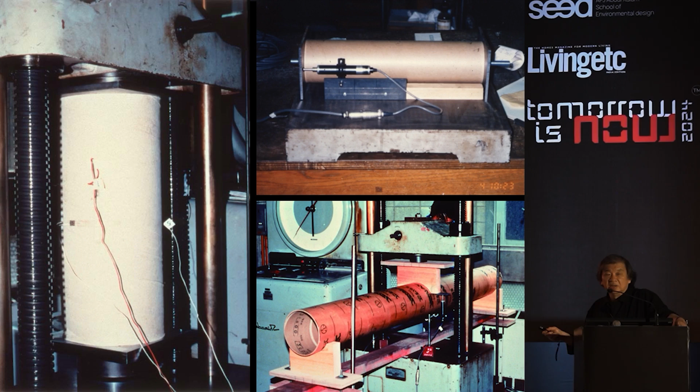Then I found out this material is so strong. So I started testing in order to use this material for building structure. Next, please.

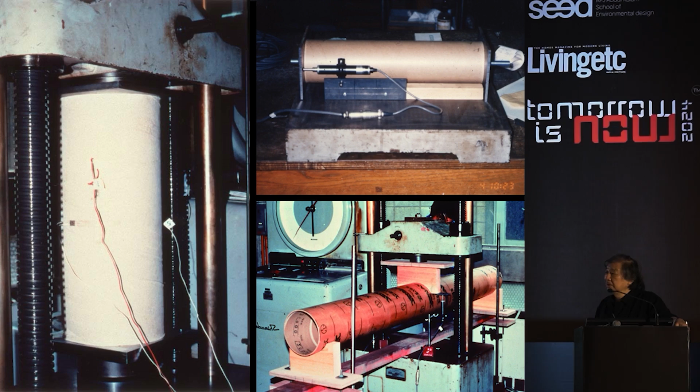This is before people started talking about environment, ecology, recycling, during the kind of economical booming period. Nobody was really interested in this kind of idea. This is the first building I built with paper tube, but it was too difficult to get special government permission to use such an unusual material for structure.

So for this building, I had to use steel posts and steel roof, and the paper tube was used as freestanding exterior and interior walls. There are 330 tubes. Diameter is 85 centimeters. Wall thickness is 15 millimeters, of course inside is empty, and the length is 8 meters. Some of the tubes are bigger, diameter 120. Inside is the toilet. Just in case you finish with your toilet paper in an emergency situation, you can tear off the inside of the wall.

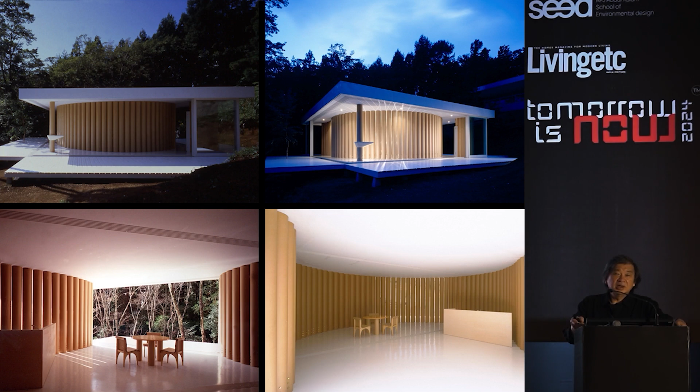Next, please. Then I designed my weekend house in order to get this complicated government permission. So I spent a year to test and to go through all the committees to convince them to get the government permission to use paper tube as a building material. So this is the first permanent building with government permission as a paper tube structure. However, I have no weekend, so still the house is empty. Next, please.

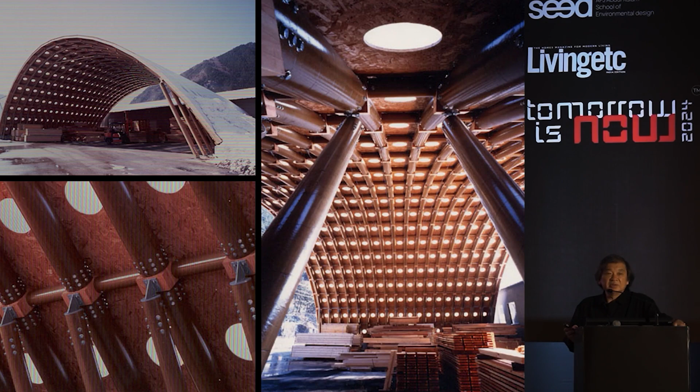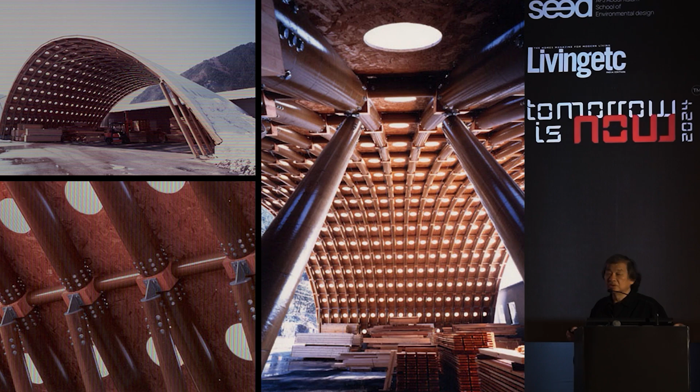A few years after, I was asked to design a roof by a local carpenter, where they have very heavy snow. They wanted to make a big roof in order to walk on during the winter season, to be built by themselves, by carpenter, not using steel. So I designed another paper tube structure with wooden joints to get another government permission as a permanent building.

This became the second permanent building out of paper tube structure. Year 2000, the world started talking about environmental issues. This is the World Expo held in the city of Hanover, Germany. The main theme of the expo was environmental issue, and I was the only architect using recyclable material for building structure. So I was chosen by the government to make the Japanese pavilion.

This was really an incredible chance to collaborate with genius German architect Frei Otto to realize the first grid shell structure in paper tube.

This is a paper tube produced in Germany.

As part of the contract, this company had to promise to recycle. After building demolition, half a year later, they had to collect them to recycle. That's part of the contract. Also, I didn't want to use concrete because concrete is a difficult material — it's actually not possible to recycle. So for the foundation, I made a wooden box filled with sand instead of using concrete.

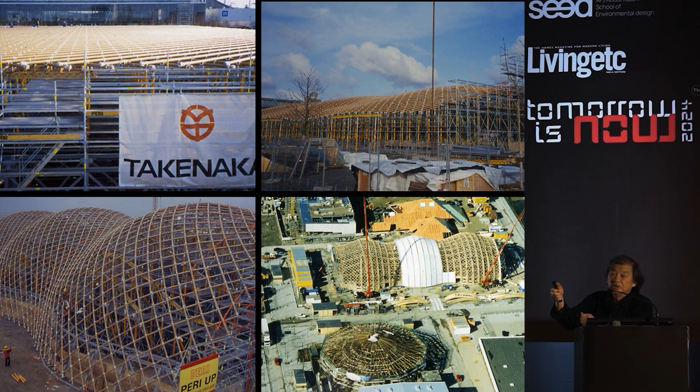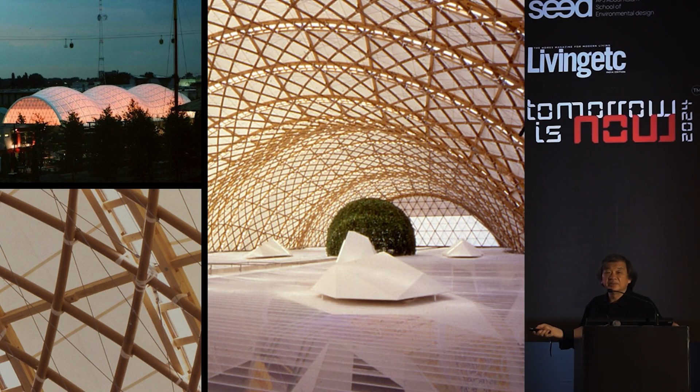And this yellow scaffolding can be rotated by hand little by little, to push up and create this three-dimensional shape to stabilize the structure. Even the connections are just fabric tapes — easy, inexpensive, and also easy to dismantle. So we covered over 2,500 square meters with paper tube structure.

This is a project called Nomadic Museum. Canadian artist Gregory Colbert asked me to design his own museum, which travels from city to city, country to country. I decided to use used shipping containers of 20 feet, 6 meters. It's not because shipping containers can travel — I chose shipping containers because this is an international standard, and we can find the same kind of container anywhere in the world. So here in New York, we built a structure over 200 meters on the wooden pier.

We rented containers from a nearby shipyard for only 3 months during the exhibition. After the exhibition was over, we just returned the containers to the original shipyard and traveled to Santa Monica Beach, Los Angeles, without bringing the containers, because we could rent the same kind of containers in Los Angeles. I made a checkerboard pattern in order to minimize the number of containers, connecting containers with the existing connection in the corner.

Inside, there is a paper tube of 10 meters supporting the roof. This is when we went to Santa Monica. We got this parking lot by the beach, but it was not big enough to bring the 200-meter museum, so we had to divide it into 2 parallel 100-meter galleries. Also, artist Gregory asked me to design additional theater space.

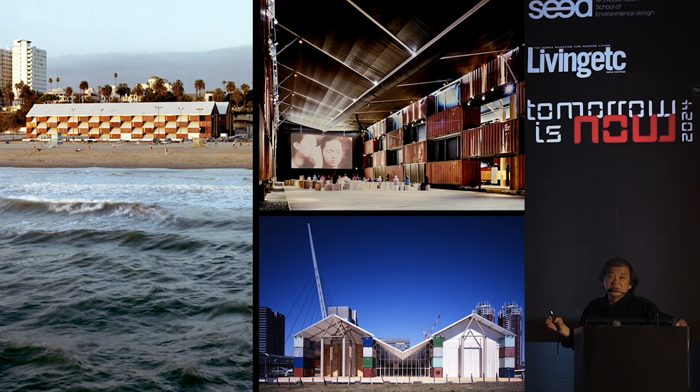So we kept the space in between the 2 galleries and made a new roof to create a theater space. The museum became 50% bigger than the one in New York without adding the number of containers — the number of containers was the same as in New York.

This is when we went to Tokyo. As you can see, the color of the container is different — this is one we happened to borrow in Tokyo.

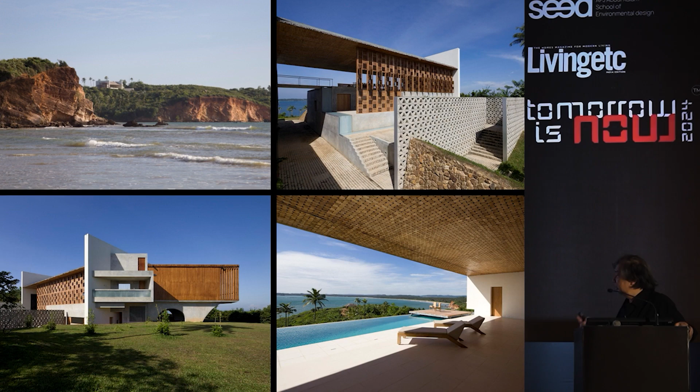In 2004, there was a big earthquake that created a tsunami in the surrounding countries in the Sumatra area — the Sumatra earthquake and tsunami. Here in south beach of Sri Lanka, the entire fisherman's village was totally destroyed by the tsunami. I went there to build housing, and one of the sponsors supporting our project asked me to design his own house after the project was over. So this is the one we built.

This client has parents who have a house. Actually, the site is so big, somewhere over there, that in the morning they use a telescope just to say good morning. This house was designed by Japanese architect Tadao Ando.

He's a genius — he didn't visit the site at all, but he built a wonderful concrete house. Further right over here, there is another wonderful house designed by Geoffrey Bawa. I didn't know Geoffrey Bawa until I went to Sri Lanka, but I was really shocked to see his architecture.

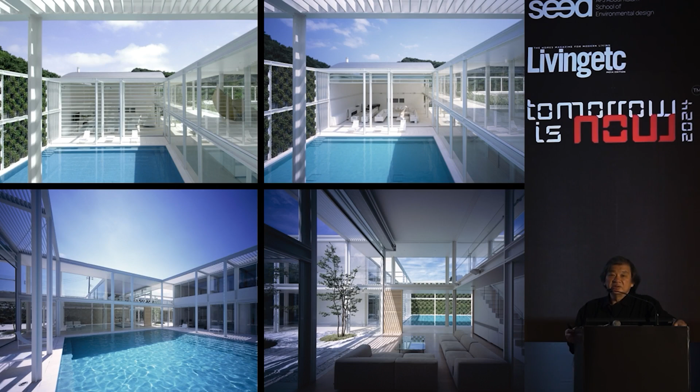This is a rather big house in Japan, in Fukushima. Although this is a big site, unfortunately there were not beautiful sceneries outside. So I made a courtyard and swimming pool inside the site, so that instead of looking out, all the rooms have a window to look into the courtyard and swimming pool.

And they wanted to go to the swimming pool very often. So this is a glass shutter, normally used for fire stations, which I improved for residential purposes. We just push a button and the shutter goes up immediately, connecting inside and outside. Even when the shutter is open, the family room is connected with the courtyard. So this is the way I connected inside and outside.

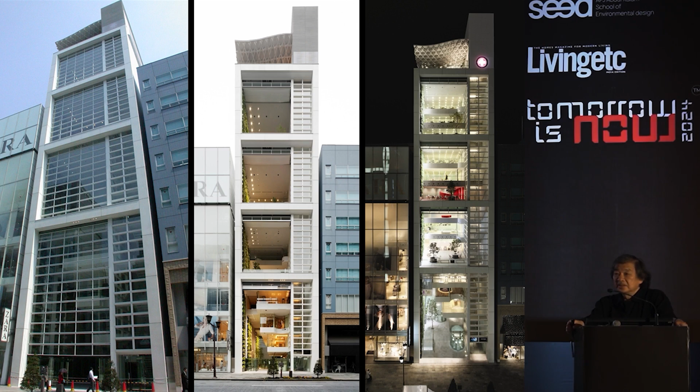This is the headquarters of the Swiss watch company, Swatch Group, which owns many famous brand names like Omega, Tissot, Jaquet Droz, Blancpain, and so on. This is the headquarters in Tokyo. This was a competition, and it was built in Ginza, the most expensive commercial land in the world. That's why the land is very narrow and very deep.

The upper part is offices. Every 3 floors there are 3-floor atriums. Even during a good season, we have to have air conditioning if it's closed. But I didn't want to depend on air conditioning, so I put glass shutters to open and take advantage of natural ventilation in the good season.

They also requested 7 boutiques of 7 different brand names. Because the site is very narrow, if we made 1 boutique facing the commercial street, the rest of the 6 boutiques would have to be in back, downstairs or upstairs. I thought that was very unfair, not facing the commercial street directly. Although it wasn't requested by the client, I wanted all 7 boutiques connecting to the commercial street directly. So I made a 4-floor opening with a glass shutter in front and back, with a green wall.

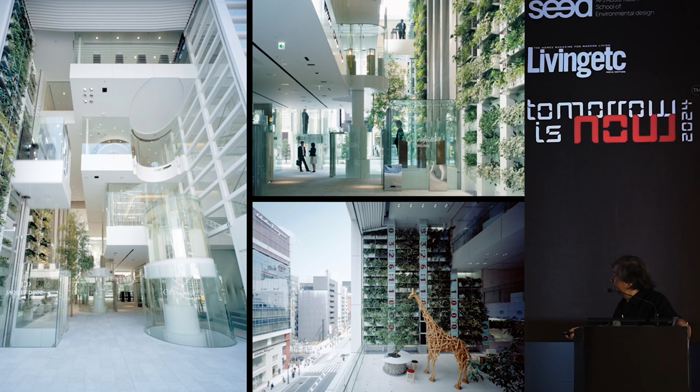And some water features to make a passage so anyone can come in and go through. Along this passage there are 7 glass showrooms of 7 brand names. Next, please. So, for example, this showroom is one of them.

Each showroom is built with a hydraulic elevator. So you can see a few items, and if you want to see more, just push the button and they go up to bring your own customer. For example, this showroom goes up to here, this one goes there. So because of this unusual solution, each boutique has direct access from the street to their own boutique.

And that is why I was lucky to win this competition. This is the 5th floor atrium. This customer service area, when the glass shutter is open, becomes a semi-outdoor space.

And here is the giraffe. Here's the true story behind this giraffe. Just before the building was completed, the president of the Swatch company came to see the construction, and I showed her around. She was very surprised when she came into this space and asked me, 'Where's the giraffe?' She misunderstood, because during the competition stage I submitted a section drawing, and in order to show the height of this 3-floor space, I drew a giraffe. She thought the giraffe was part of the design, and she was so insistent that she didn't want to accept the building as complete unless she saw a giraffe. So I had to spend my own money to make a giraffe out of wood. This is a real true story.

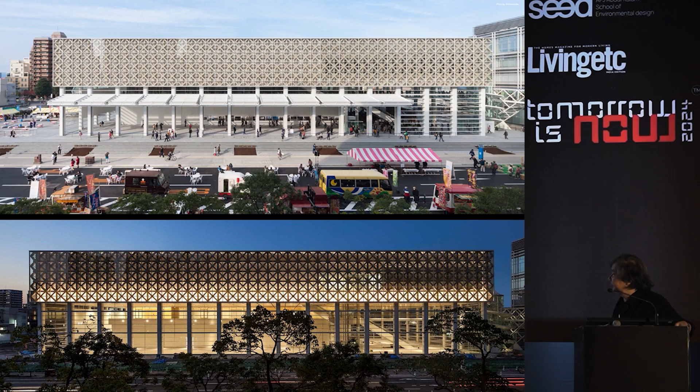This is a museum in Oita Prefecture, south of Japan. This was a competition. Normally a museum is what we call a black box or white cube, a rather closed box, but I wanted to open the museum to the public and the street.

So I made a special door called a bifolding door to be opened to the street. In good season, they sometimes close the street to have many different events, so the inside of the museum can be connected to the street easily.

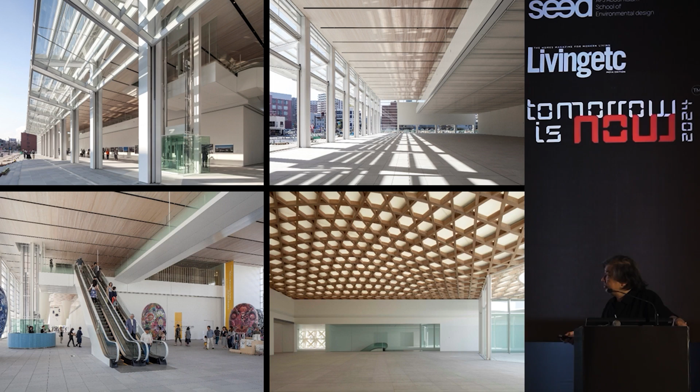The Oita area is very famous for bamboo craft. So I made a 3-floor gallery with a timber structure, woven using locally available cedar trees, like woven bamboo patterns. Next, please. This is the bifolding door when it's open.

The ground floor lobby and gallery ceiling is hung from upper floors, so there are no pillars. We can have movable partitions to close off or create different layouts depending on the type of exhibition, freely, without any pillars.

This is the 3rd floor lobby with the skylight. It's like a woven bamboo pattern in timber, bringing natural light into the main lobby. Next, please.

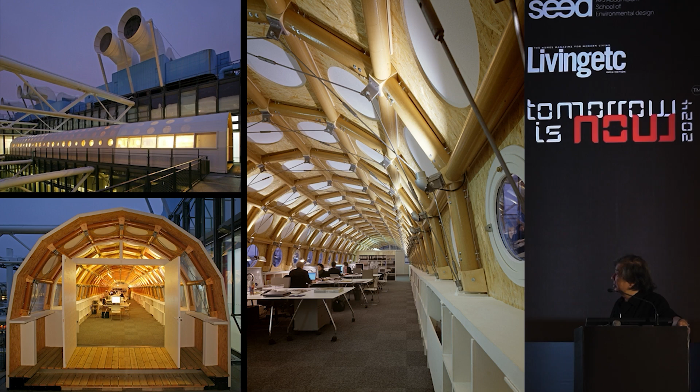This is the famous Pompidou Center in Paris, designed by Renzo Piano and Richard Rogers, completed in 1977. In 2003, the Pompidou Center organized an international competition to design a satellite museum in the city of Metz, on the east side of France.

I was very lucky to win this competition. When I visited museums designed by, for example, Tadao Ando or Arata Isozaki after they won competitions outside their home country, I was always surprised because the final completed design is different from what they submitted. And I found out the reason.

Normally, when we work outside our country, we have to collaborate with locally licensed architects. We also chose good architects, but in the end, they become our enemy. Instead of listening to us to make a complicated design that would go over budget or extend the construction period, they sided with the client to save money and build on time, because they have to spend the next many decades with the local client. That's one reason why when we get a project outside, it's very difficult to realize what we design.

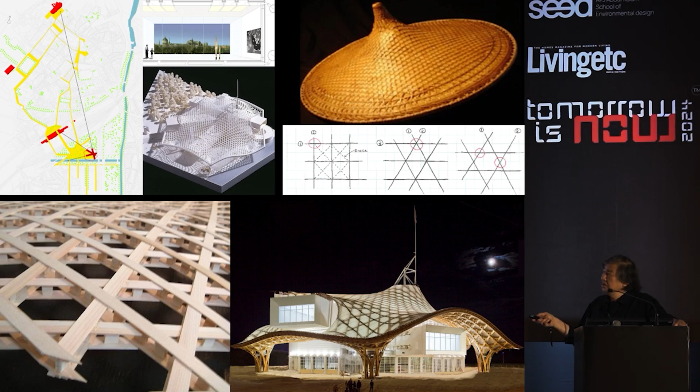Next, please. This is what I submitted for the competition. This is the map of the city of Metz. This is the central train station, 90 minutes from Paris by TGV. The main part of the city is on the north side of the train station. Our site was on the south side, which was totally empty.

Although we were away from the center of the city, I wanted to connect my museum with the center of the city. This is the model I submitted.

There are 3 so-called gallery tubes, 15 meters in width, 90 meters in length. 3 of them are stacked on top of each other and shifted 45 degrees. At the end of each gallery, there is a picture window. The top tube faces the very famous cathedral, framing it with the picture window.

The second tube faces the train station. Because Metz is on the east side of France, after every war it was occupied by the Germans, so this city has lots of classical German, wonderful architecture all over, including this train station, which is already an important part of the history of the city. So the second tube frames the central train station.

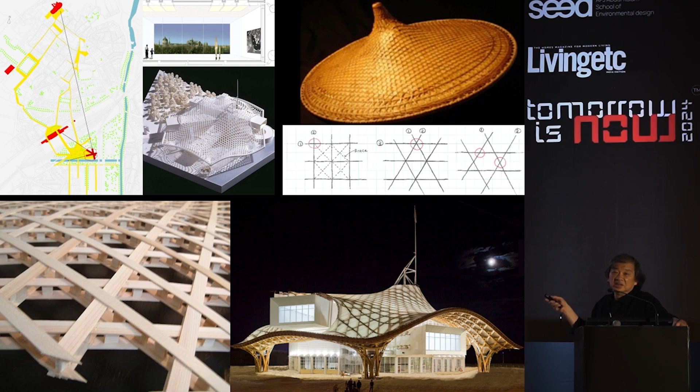The roof I wanted to design in timber. The idea comes from a traditional bamboo hut. I studied different patterns. For example, if we divide a square, it's easy, but because a square doesn't have in-plane stiffness, we need bracing, and the connection becomes very complicated.

If we divide with triangles, it's a very stable shape. We don't need any bracing, but there is always a connection where 3 elements meet.

The pattern commonly used for bamboo craft has a hexagon and triangle combination. A hexagon alone doesn't have in-plane stiffness, but because of the triangle, we don't need any bracing, and at every connection, only 2 elements meet. That is why many bamboo crafts use this pattern, because the joint is very simple. So I made this pattern, with an upper chord and lower chord connected with wooden pieces.

I wanted to avoid using complicated steel connections in order to take advantage of the characteristics of timber. Once we use steel connections, this is no longer a timber structure, just a steel structure. So I want to avoid metal connections. Here we just need a long board to connect all the pieces together, so it's very simple and easy.

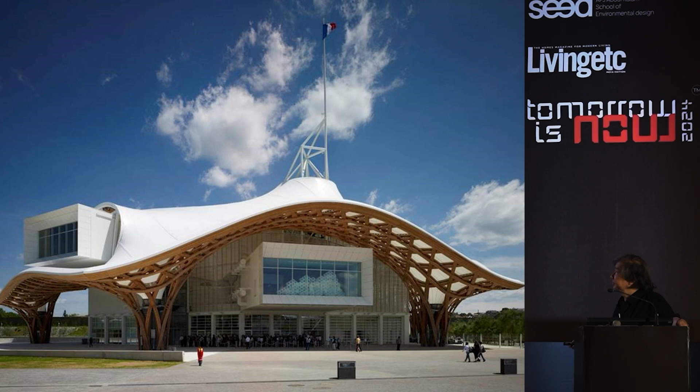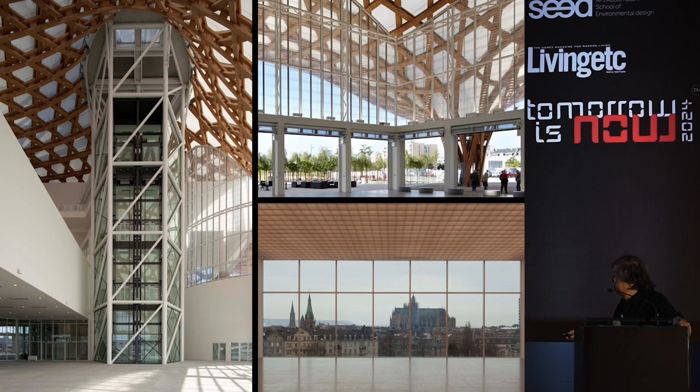This is the completion. This is a picture window. The ground floor is covered by the glass shutter. Before opening hour, people wait under the big roof in front of the glass shutter. When opening hour comes, the glass shutter opens to connect inside and outside. This picture window frames the cathedral.

The central tower, with the elevator and emergency stair, is made as a steel tower, hanging all the timber structure. So this is a tensile structure, a tension structure.

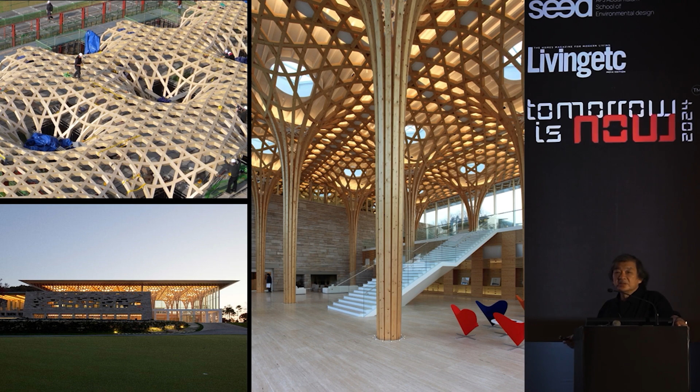While I was designing Pompidou Center in Metz, I was asked to design a golf clubhouse in South Korea. The chairman of this company really loved my design for the Pompidou Center roof, so he asked me to design the roof in timber. This is a construction photo. I used the same pattern, hexagon and triangle, but this is a simple compression arch, not a tension structure, so we don't need any metal connection. We just cut and connect with traditional joineries.

This technology of making three-dimensional timber cutting only exists in Switzerland and Germany. It doesn't exist in Japan or South Korea. But this was a request of the client, so we had all the elements cut in Switzerland and brought over to South Korea to assemble locally.

Because I don't play golf, I didn't know what was inside. My only memory of golf is from when I was very small, when my father used to take me to the golf practicing range. At that time we put the ball on a tee made of wood. That was my memory. Now the tee is made of plastic, so I made the structure like a wooden tee.

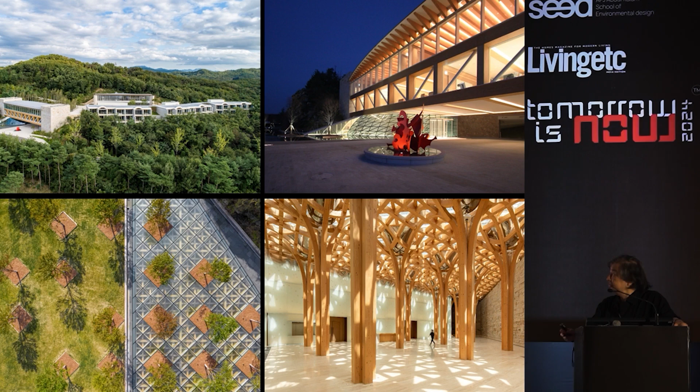The same client asked me to design the employee training center on the same campus. The main element of this program was a big hall like this. But I didn't want to put a black box like an auditorium on such a beautiful landscape, so I put it underground. But I didn't want people to feel like they were underground, so this is a foyer made with a timber structure, supporting a glass roof with a pond of water.

On top of each tree column, there is a stainless steel pot with mud, growing trees, so that this pattern of timber extends up on top of the water, bringing natural light through the water, and light and shadow.

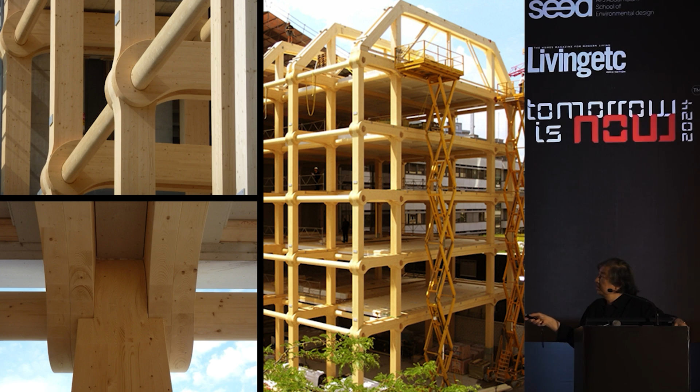This is a 7-story office building in Zurich, Switzerland. Again, I didn't want to use steel connections. I designed the rigid connection without steel. The post, one column and two beams, and the perpendicular beams, have an oval profile. The oval profile beam is inserted so that it doesn't rotate. This became a very good rigid connection without metal connections.

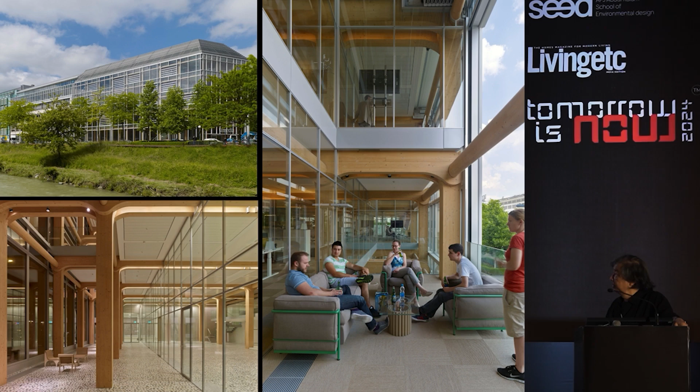The exterior is just a simple aluminum curtain wall with a glass shutter. On good days, the glass shutter can be totally opened to connect inside and outside, creating an in-between space.

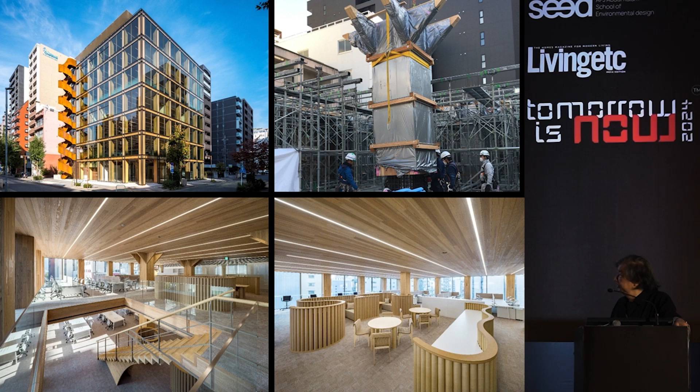This is a 7-story office building in Nagoya, Japan. In Japan, we have terrible fire regulations, very, very strict, so we cannot build a 7-story timber building like in Switzerland. We have to cover the timber with cement or plasterboard, and there are many timber-looking buildings just covered with thin wood over cement or plasterboard. I didn't want to make such a fake timber structure.

Even with this very strict fire regulation... when the concrete is dry, we remove the plywood formwork and finish with different materials, so there are many layers. I made a concrete formwork out of CLT, serving as the concrete formwork but also as the final finish. So this prefabricated CLT formwork just covers the steel and holds the concrete, remaining as the final finish.

We also tested it. The concrete takes the compression and the surrounding CLT works for the bending. So this is a hybrid structure between CLT and concrete, exposing CLT as the final finish, and we can save a lot of time in construction.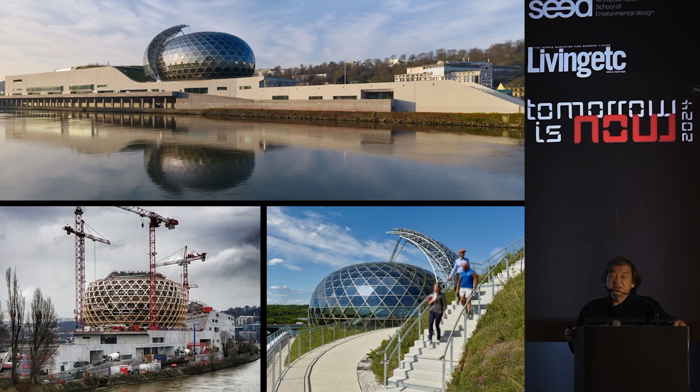This is a project called La Seine Musicale in Paris. This is a theater complex. This was also a competition.

This is an island in the Seine River. This used to be a Renault automobile factory in the 90s, but they moved out and it became empty. The local government decided to organize a competition to make a theater complex, and I was very lucky to win.

This location is kind of an intersection of the highways, and after they intersect, they drive east to the center of Paris. So the local government wanted to have some kind of symbolic monument at this intersection of highways. I made this concert hall for 1,200 seats.

In timber, covered by glass. This is a sail. Normally a sail receives wind pressure, but this one receives sunlight to create energy. It's a solar panel which follows the sun, moving little by little, always facing the sun so it becomes more efficient at creating energy. But this also creates shading behind the sail to save on the air conditioning effect.

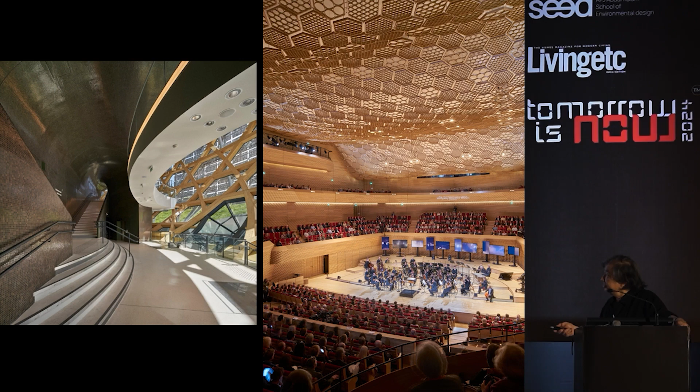I made a totally new mosaic tile working with an old mosaic factory in Vicenza, near Venice in Italy. This changes color depending on the angle of the sun, from red to green. This is the timber structure, as you can see, and the back of the solar panels.

This is inside the concert hall. The roof is made with paper tube, using different diameters of tube. I worked with a very good acoustical engineer to make this paper ceiling achieve good acoustical conditions.

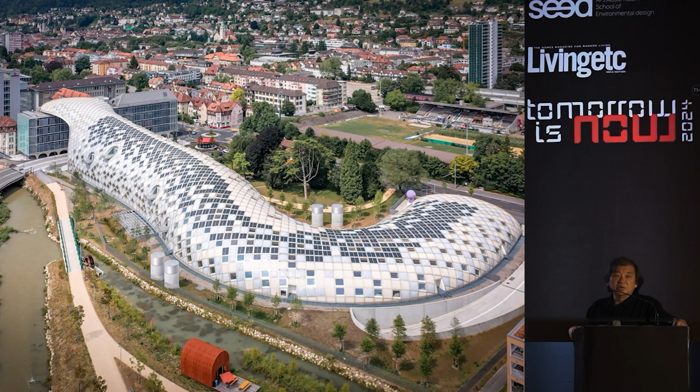This is the headquarters for Swatch and Omega in Switzerland, in Biel/Bienne. Because the shape of the site was rail-shaped, I made the headquarters of Swatch an organic shape, since the design characteristic of Swatch is rather playful and colorful, instead of the Omega design which is quite rigid. So the other building I designed for Omega was quite straightforward.

This became one of the biggest timber structures, covered by solar panels and ETFE membrane. This structure also covers a public street leading to the next building. This is the museum and conference center for Omega and Swatch.

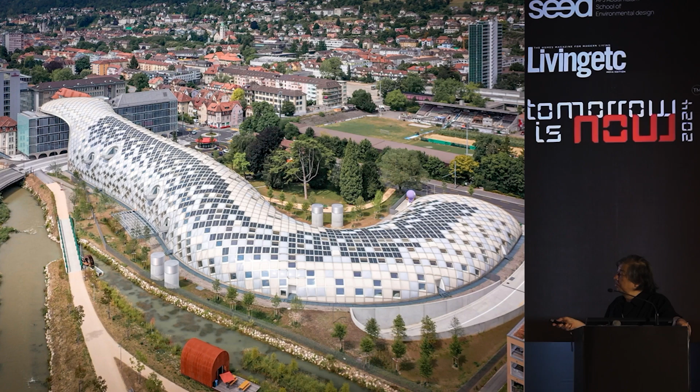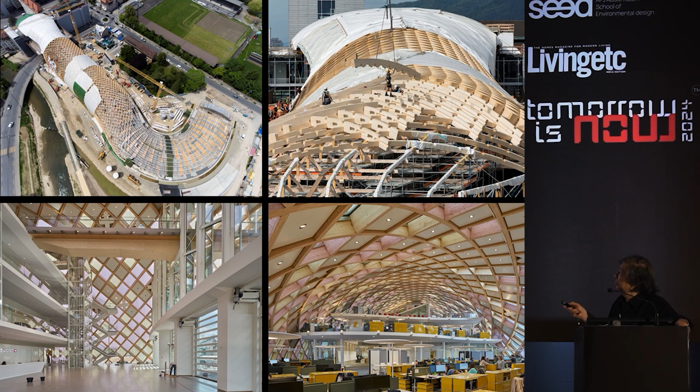As you can see, the timber structure covers a public street, and on some Sundays they can close the street to have a public event under this big roof. This is a construction photo. As I explained, Switzerland has a wonderful three-dimensional cutting machine. Each element is cut totally precise, so we just need a big rubber hammer to fit them easily and quietly. Construction is very quick and easy.

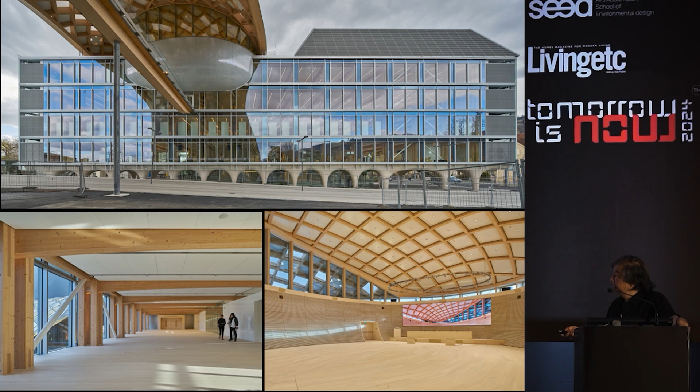Inside of the office space, inside the foyer space. This is the building in front, the museum of Omega and Swatch and the conference hall. Only the ground floor is made in concrete. The rest, four floors, is timber - beams, columns, floors - and this roof coming from the Swatch building is a conference hall.

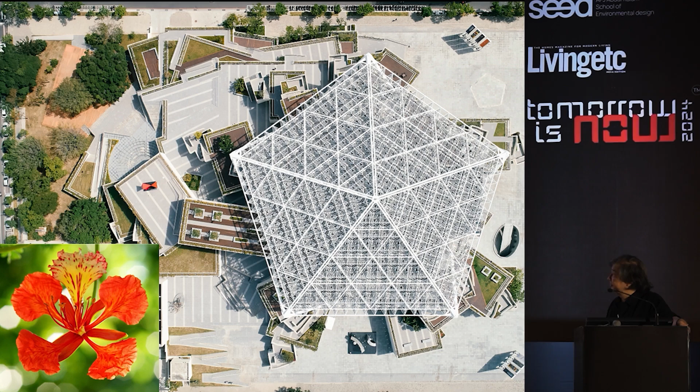This is a museum in Taiwan, in the city of Tainan, south of Taiwan. This is a flower, the symbol flower of the city of Tainan. It's a pentagon, so I made a pentagon roof. It's called a fractal roof.

I wanted to create a park in the middle of the city, so each gallery is stacked on top of each other and shifted to create a sculpture garden, and also a garden for the people. The public can come up freely and enter the museum from any level.

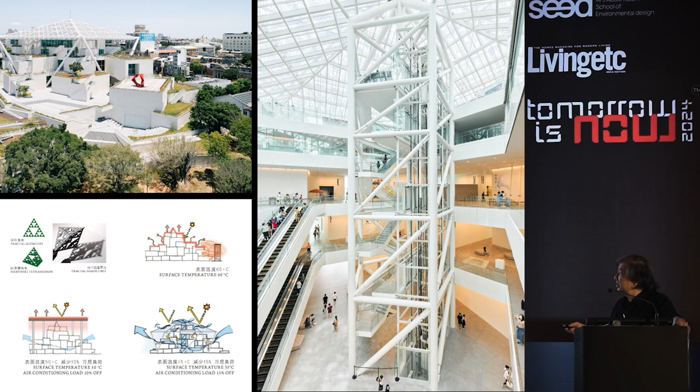This is a diagram showing what fractal geometry is. Fractal geometry is one where you can divide, and the same proportion of geometry repeats forever. For example, this is a triangle - you can divide it smaller and smaller, and always the same triangle is there. So this is fractal geometry.

Professor Sakai of Kyoto University found that if we put wind through a three-dimensional fractal shape, it creates movement of the wind. So he made some parasol shapes as a resting area in the park. I collaborated with him to make a big fractal roof to cover this museum.

This is a simulation by computer. If the building is exposed totally without any roof, the surface temperature becomes 60 degrees. If we have a roof, we can reduce 10% of air conditioning, but there's still radiation. If we cover it with a fractal roof, it's like being underneath big trees - very cool because it creates movement of the air. We found we can reduce 15% of air conditioning under the fractal roof.

So this is why we made the fractal roof to cover the building, to bring natural light and shadow to the main atriums. This is the most recent small museum in Hiroshima.

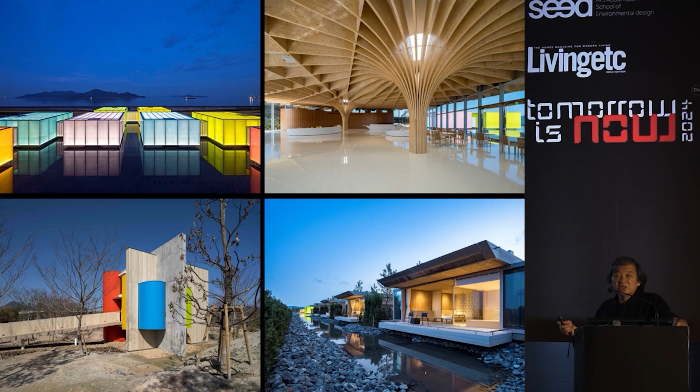This is a floating gallery. Hiroshima is very famous for shipyards, there are many ship companies building ships, so I collaborated with a shipbuilding company to make this gallery on top of the floating platform. This is standard technology to carry things behind the boat. I made a small gallery on top of them, 8 of them.

This is the water. When we have different exhibitions, we can change the layout of the gallery by making the gallery floated. By adding more water, this gallery can be floated, then only 2 men pushing by hand can move the location of the gallery. After we change the location, we just put bridges to make a different layout, and we remove the water, then the gallery sits on the bottom to stabilize. So every time you go to the museum for different exhibitions, we can see the shape of the museum is different.

This is the main foyer space with timber structure. It's oval shaped, with two center points with the timber structure. There are 10 different villas.

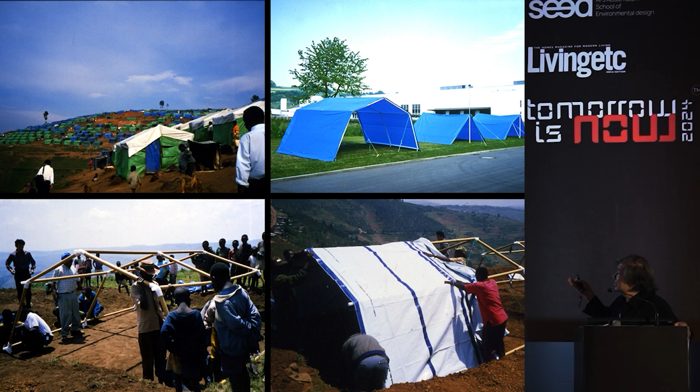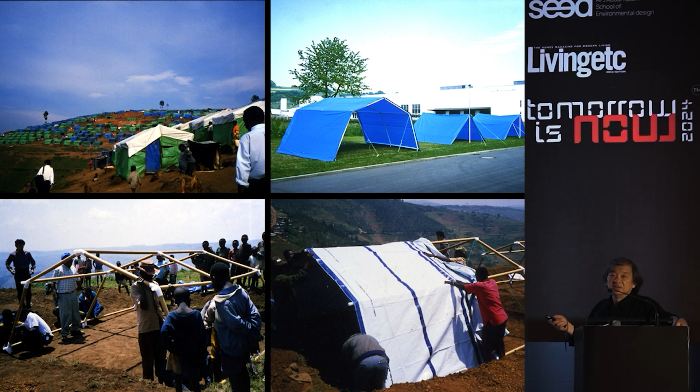Behind this, there is a seminar house designed by Tadao Ando. Further right, they have another factory designed by Nicholas Grimshaw and Alvaro Siza. Further right, they have their own fire station designed by Zaha Hadid. So this company has the most expensive collection of architecture, and my prototype became their cheapest collection.

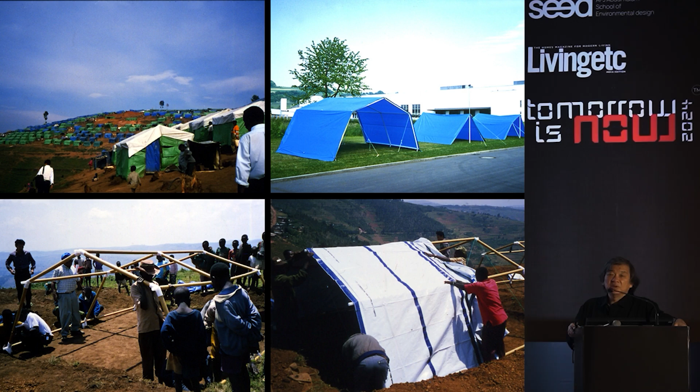This is the Byumba camp. Although I wanted to design something more comfortable, because of the policy of the United Nations, we are not supposed to give them something comfortable, because if the shelter is too comfortable, they're going to stay there longer. They want them to go back home as soon as possible, so I had only 50 US dollars per unit. This is a very simple shelter made of recycled paper tube in order to stop deforestation.

Year after, in 1995, the city of Kobe, Japan had a big earthquake. Over 6,000 people were killed, and the city was also set on fire after the earthquake. I read in the newspaper that there were Vietnamese refugees gathering at a Catholic church.

I thought the refugees must have had a more difficult time than the Japanese evacuees, so I went to see them at this Catholic church. The city was totally destroyed by fire, so it was very difficult, but I finally found this church. All the buildings were destroyed by the earthquake and the burning fire that followed. They were having morning service outside, around the fire.

After the morning service, I proposed to the priest: why don't we rebuild a temporary church out of paper tube structure? He thought I was crazy proposing building after the fire, and he didn't trust me. However, I didn't give up. Every Sunday, I commuted to Kobe.

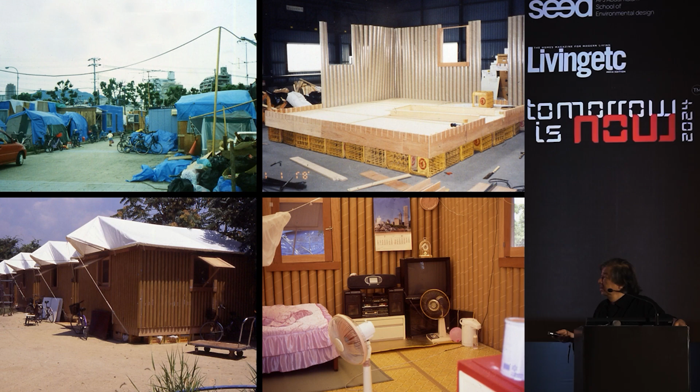And I met the Vietnamese people. They are living like this in a park with a plastic sheet. In fine days, inside the temperature becomes over 40, and on rainy days, all the floor gets wet.

Also, the government started making temporary housing, but Kobe is a very congested area. They built temporary houses outside of the city, but these people have jobs only in particular factories in particular areas. If they move out from the city, they can't do their job, so they want to keep living here even in such a poor condition.

However, Japanese neighbors try to kick them out because they are afraid the park is becoming like a slum. However, they have no place to go. So we decided to make temporary housing for them.

So I gathered my students, and this has to look temporary, but it has to be more comfortable. So this is a 10 centimeter diameter paper tube, only 4 millimeter thick, sitting on top of a foundation made of plastic beer crates. In Japan, there are two major beer companies, Kirin and Asahi, but Asahi makes their beer crate red, which doesn't go with the color of the paper tube.

So I asked Kirin to donate the beer crates, but we were very disappointed because we expected they would donate beer crates with beer inside, but they were totally empty.

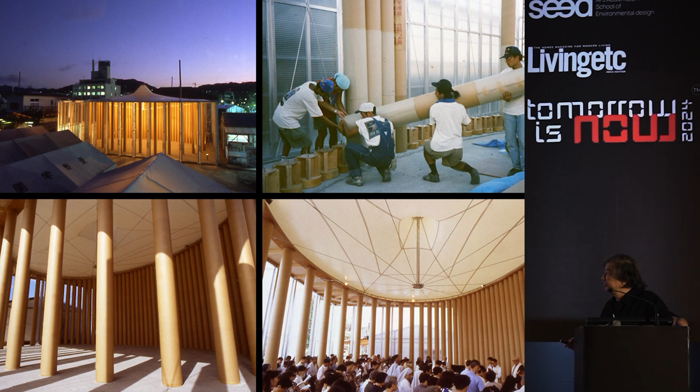People lived there for 4 years. Then the priest trusted me to make a temporary church. We only got a 10 meter by 15 meter rectangular site.

Students came from all over Japan to make it out of paper tube. It's a rectangular shape, but the paper tubes were laid out in an oval shape, which comes from one of my favorite churches, designed by Bernini in Rome.

This is the first time they had a morning service under the roof. The priest thought they could use it for a few years, but it was there for 10 years, because it became a symbol of the reconstruction of the city. It was used not only for religious services but also for many community services: concerts, movies, weddings. So this became a symbol of the city.

So they kept it for 10 years. But after 10 years, they decided to rebuild something bigger. I was very lucky to be the designer. But also there was a big...

earthquake in Taiwan. We disassembled them to send over to Taiwan, and reassembled it in the village of Puli as a permanent church and community center.

It's still there. There I wonder, what is the definition of a temporary structure? What is the definition of a permanent structure? Even a building made of paper by a student can be permanent, as long as people love it.

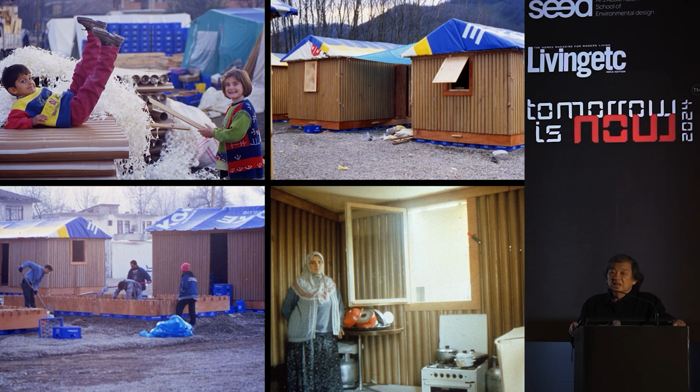In 1999 in Turkey, they had a big earthquake. I was asked to make temporary housing. All materials were locally available. Paper tubes and plastic beer crates were donated totally free of charge by local manufacturers.

And this is my favorite photo. Children helped us because it was very cold. We put waste paper inside the paper tube to make the wall more insulated.

In 2001 in Gujarat, there was a big earthquake in India, and I was asked to make temporary housing. All materials were locally available.

Even this paper tube was made by a fabric company - they make their own paper tubes to wrap fabric around for shipping. The only thing I couldn't get was a beer crate, because, as you know, nobody drinks beer there.

So my local Indian architect proposed using a red Coca-Cola crate, but I thought a red Coca-Cola crate didn't fit into the context of this location. So we made a traditional mud floor and foundation.

Some of them are used as a house, some as a school. This is a photo I received last year from local architects - it's still there, used as a local clinic.

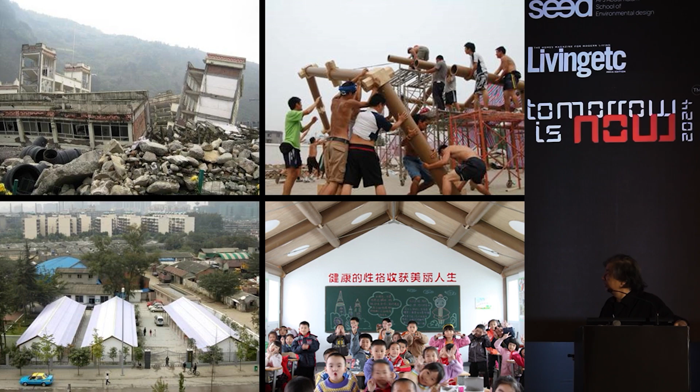2008, two months before the Beijing Olympics, the city of Chengdu had a big earthquake, over 80,000 people killed. Also, many of the schools collapsed, killing children.

I started preparing temporary houses, but the local government didn't want any foreigner making temporary houses. Instead, I met the schoolmaster, and she asked me to make temporary classrooms. So I brought my Japanese students to work with the local Chinese students for 5 weeks.

Using locally available paper tube with wooden joints, we made 9 classrooms with a timber and paper tube structure together with the students. As you can see, the children are so happy because they could come back to their original school. It's still there.

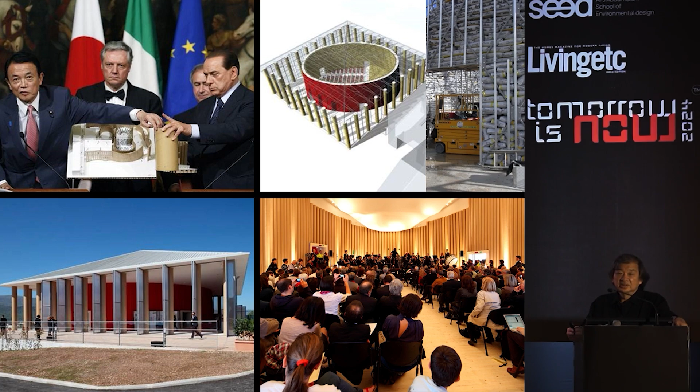2009, Italy, the city of L'Aquila, near Rome, had a big earthquake. This is the former Italian Prime Minister, Mr. Berlusconi, and he decided to bring the G8 summit to L'Aquila. This time Russia was part of the summit, so this was not G7, this was G8.

Because of this big earthquake, he decided to bring the G8 summit to L'Aquila to ask the international community for some support. Immediately after the earthquake, I went there to meet the mayor. The mayor asked me to design a temporary music hall, an auditorium, because this city is very famous for music. They have their own philharmonic orchestra and school of music, but they had no place to play.

That's why I started designing a temporary concert hall. I got a phone call from the Japanese ambassador in Rome, and he decided to support my fundraising. So this was a wonderful press conference with the Italian Prime Minister and also the Japanese Prime Minister, showing my model. Mr. Berlusconi didn't know what he was holding - he was holding a paper tube. Because of this successful press conference, I got €500,000 to build the temporary concert hall.

I didn't want to use concrete for the wall, although it had to be very well acoustically insulated. I just made a frame out of scaffolding pipes and put sandbags in to get very good sound insulation. Inside, it's covered by different diameters of paper tube as an acoustical element. The exterior tubes are structural, just covered by a red curtain.

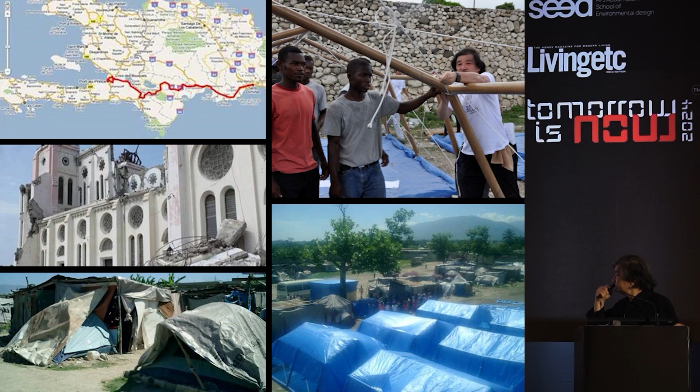2010, Haiti, a small island in the Caribbean Ocean. The south left half is Haiti, the right half is Dominican Republic. Because the airport and Port-au-Prince, the capital of Haiti, were totally destroyed.

I had to fly over to Santo Domingo, drove over 7 hours, and found a situation like this. I couldn't get any material locally, so I made a team with students in Santo Domingo, preparing paper shelters to bring over and train local people to build them themselves.

2011, north of Japan, we had a big earthquake, tsunami, and nuclear problem. This is a typical emergency evacuation facility, a gymnasium. There's no privacy - the government doesn't care about privacy. But I thought privacy is the most basic human right between families.

So I made a partition system with paper tube - small diameter tubes just inserted, hanging fabric with a safety pin - and we can open and close it to adjust the size depending on the size of the families.

In the beginning, all the government authorities who organized the evacuation facilities rejected them. They said it's easier to control people without partitions. They didn't care. But in this particular city, the tsunami killed the mayor and most of the city officials, so this facility was organized by a physics teacher from the high school. He doesn't say what the government says - he said this is a very good idea.

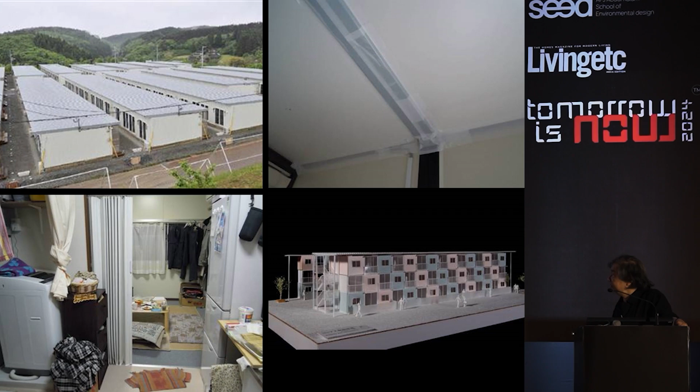After people have spent 4 months in evacuation facilities, they can move to temporary houses made by the government like this. It's very poor - they're so close to each other, it's difficult to open the window. Inside is so messy like this.

Also, many areas had the ground fluidized, which means the ground became like this. So I knew that there are many areas that don't have enough flat area to make a single-story temporary housing.

So I prepared 3-story temporary houses with 20-feet shipping containers stacked in a checkerboard pattern, and got permission from the government. Then when I went to different cities for partitions, I asked the mayor if they didn't have enough place, this is another solution.

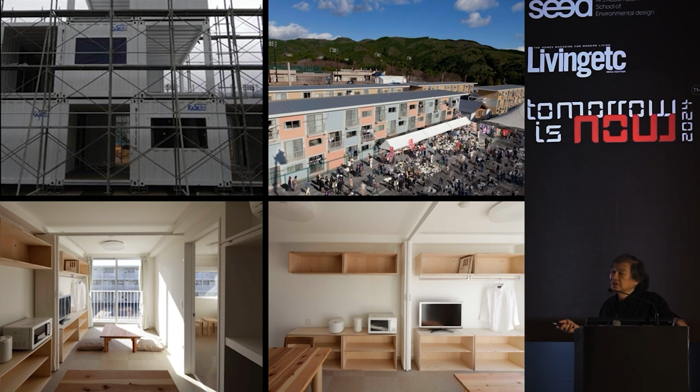At one city called Onagawa, the mayor accepted this because they only had one baseball ground for 190 units, so they had to make it 3-story. We made the foundation out of steel plates, stacking containers in a checkered board pattern. This is the inside. Because I had to use government money, I had to design the same size using the same budget. Although it's the same budget and same size, we can still make something comfortable.

However, I created a new problem. Normally people can stay there for 2 years, but nobody wanted to move out, so they were there for 8 years. Recently they finally moved out and went back to the baseball ground.

A few weeks before the earthquake in Japan, there was a big earthquake in Christchurch, New Zealand, and 28 Japanese English school students were killed. This was big news, but after the Tohoku earthquake, a few weeks later, this news was gone.

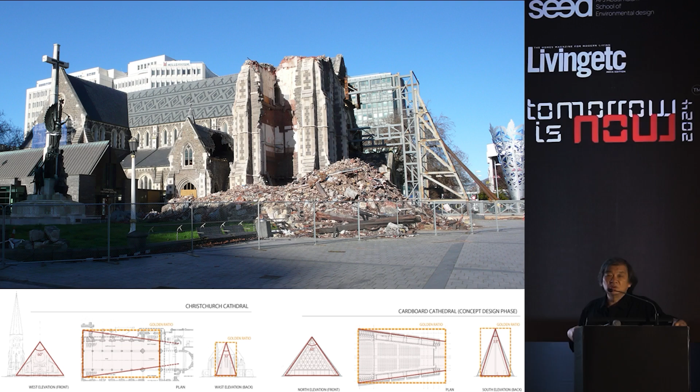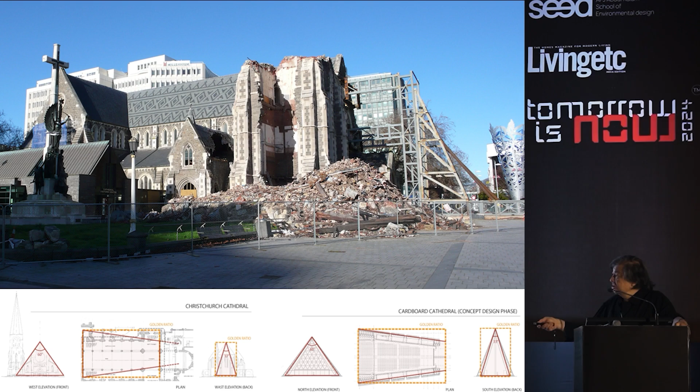But I got an email from one of the priests of the most important Anglican cathedral in Christchurch. He said, you must be an architect who can design a temporary cathedral free of charge. I said, if the church is used not only for religious service but public use, I'm happy to do it. Although I was very busy working in north Japan after the earthquake, I also commuted to New Zealand. First, I analyzed the geometry of the existing cathedral, finding the golden section as a rule to use for the new design.

She loves the building, but I had only one fight with her at the end of construction. I tried to make the cross in paper, she said it looks cheap. But I told her, in Japanese, by coincidence, we call paper 'kami', which also means God. So I told her making the cross out of paper must be very lucky. So she was convinced to make the cross out of paper.

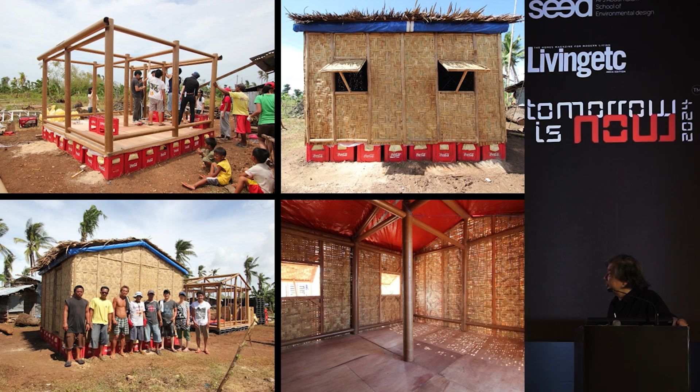In 2014, Cebu Island in the Philippines had a big typhoon and earthquake. I went there. In Taiwan and the Philippines, they have a big beer company called San Miguel, but it was difficult to get them to donate beer crates, so finally I had to use Coca-Cola crates. Because of the climate, we made the wall with woven bamboo, a standard element with nice ventilation.

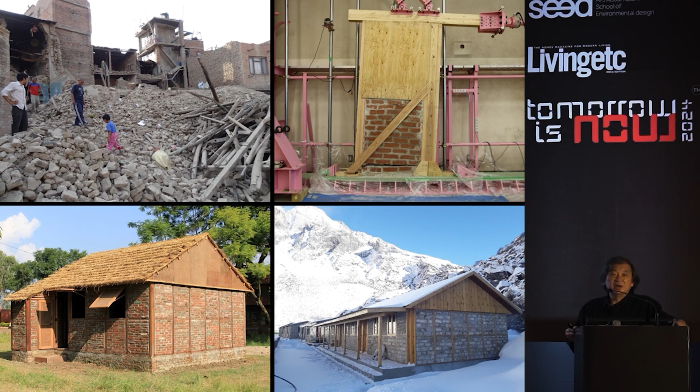In 2015, Nepal had a big earthquake. Because most buildings made of brick are not really good for earthquakes, I didn't want to waste the rubble of brick. This is a test I did in Japan to design a wall with a wooden frame filled with brick to meet Japanese earthquake standards.

So this is a house we built with a wooden frame filled with brick from the destroyed buildings. This is an elementary school in the mountains; brick was not available, so we used stone instead as a permanent elementary school.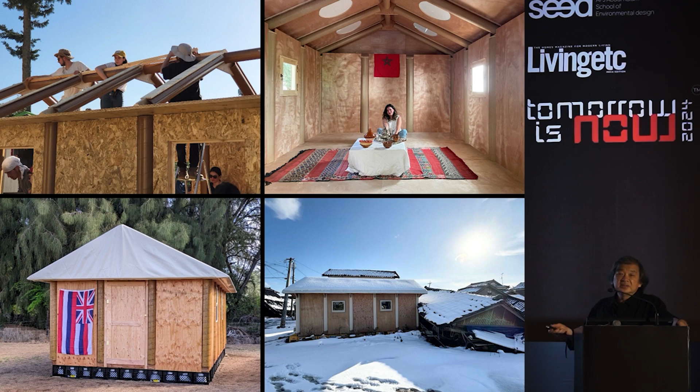This is a paper log house we built last year in 4 different locations. This is in Turkey, near the Syrian border, in Antakya. They had a big earthquake in February last year.

This is Marrakesh. In September they had a big earthquake. I always work with local students to build the house. Material was prepared in a school workshop and built in one day by students.

This one is in Hawaii. In August they had a big fire, and there's a Japanese temple there. They asked me to make a temporary house, and now we are also designing a temple out of paper tube.

This is also the same type of house, built in May last year in north Japan, called the Noto Peninsula. Actually, this photo was taken January 1st. The same area had a much bigger earthquake that destroyed many houses and killed 500 people.

This house was okay last May, but because of the January earthquake, it was destroyed, laying on my paper house. It was no problem, so my house was really good, even for such a big earthquake.

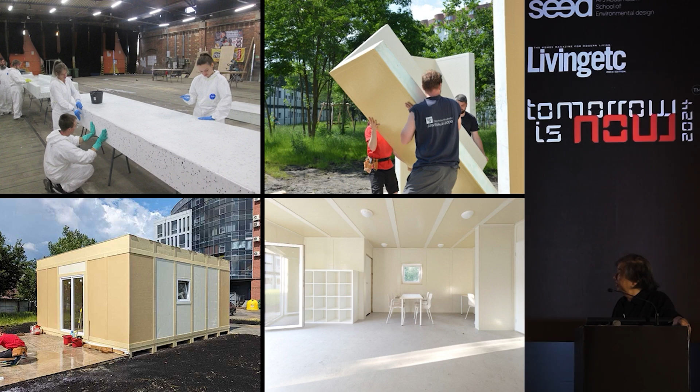Also, I started preparing affordable housing with a Polish student. This is a system made of styrofoam, foam core, which is normally used for packing cardboard boxes and also for insulation. We just put glass fiber reinforced plastic on it. We don't need any machine, we just paint by hand.

Because it's very lightweight but very well insulated, we made the modules with students and brought them over to Lviv city, which is on the west side of Ukraine, to be built by students in one day. This is the inside. This is the affordable housing system we are preparing now for Ukraine.

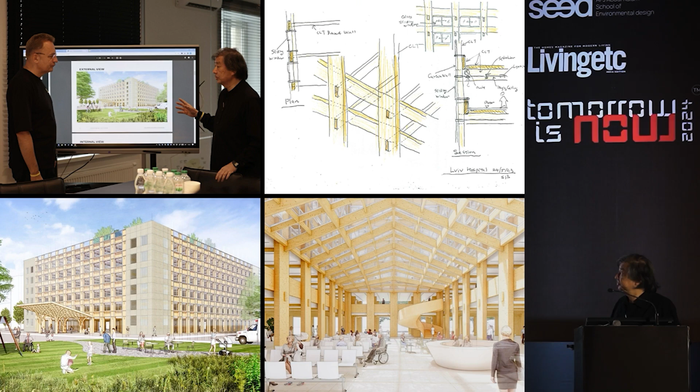This is another project in the city of Lviv. This is the mayor. He asked me to design a hospital of 25,000 square meters. Because the city of Lviv is on the west side of Ukraine, it's rather safe. That's why there are so many internally displaced people and many injured people from the war in this hospital, so it's over capacity. So they decided to make a new one.

Ukraine has the biggest CLT, cross-laminated timber, factory in East Europe. They used to export to Canada and the US, but now they cannot. So the mayor asked me to design this hospital using this locally available CLT. However, Ukraine has very strict fire regulations, like Japan, so we cannot make such a scale of building in timber.

However, as you know, Ukrainians want to be part of the EU, so the mayor decided to adopt EU building regulations so that we could make such a hospital in timber. This is my sketch using timber connections without metal connections. Only four cores in four corners are in concrete for the emergency stair and elevator; other than that, it's all exposed timber.

Construction will start next spring. This is going to be the first timber structure in Ukraine built under EU building regulation. That's it, thank you very much.

Delightful, insightful lecture. It was truly a privilege to see your work, both the commercial work as well as the humanitarian work that you're doing. One question I had for you: the structures you create really push the limit of engineering. How do you work with consultants and your team? Also, you talked about challenges working with local bodies and regulations. Can you give us an instance of a challenge you faced with structure as well as local regulations?

Building timber structures in Europe, there are no problems—it's very easy because of the regulations. But building in Japan and other countries with very strict fire regulations is always a challenge. In Europe there are many good engineers, timber specialists, and timber manufacturers, so I never had problems, except prejudice from city governments because they have never seen such structures before. It's sometimes difficult for them to understand, but I always prove it by testing, and then there's no problem. We always have to prove materials by testing with engineers and specialists, then we don't have any issues. But making a paper building is more problematic because authorities always have prejudice about paper.